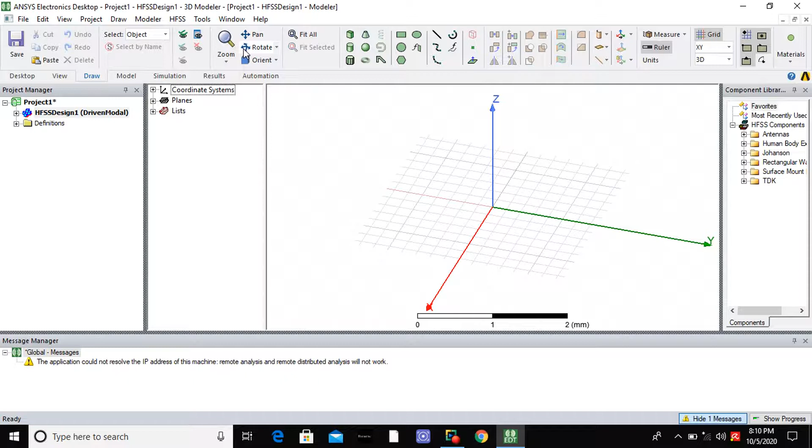First of all, we already know we are going to draw one microstrip patch antenna. The first one is the substrate, the bottom of the substrate is the ground, and the top of the substrate is the patch layer. So first of all, we are going to draw the substrate. Select box, then draw the box. Instead of Box1, you name it substrate.

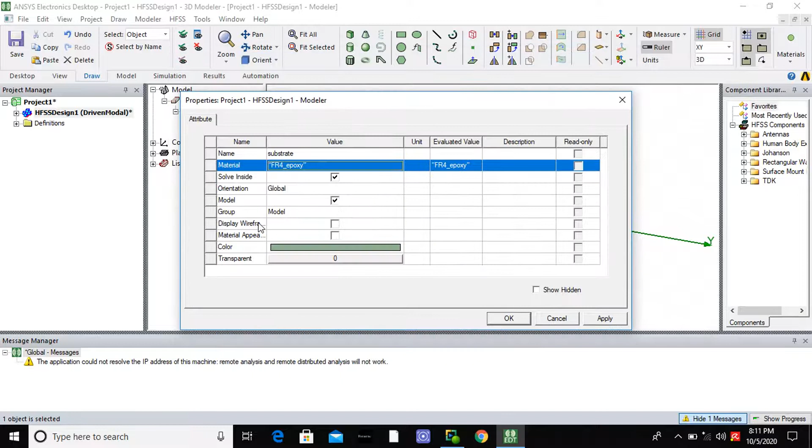Instead of material vacuum, you select FR4. Why are you selecting FR4? You already know it is easily available in the market. Select any one color, then OK, then apply, OK. Within the substrate, you have to give the length and width of the substrate. Here length is 60, width also 60, then Z, the height of the substrate, is 1.6.

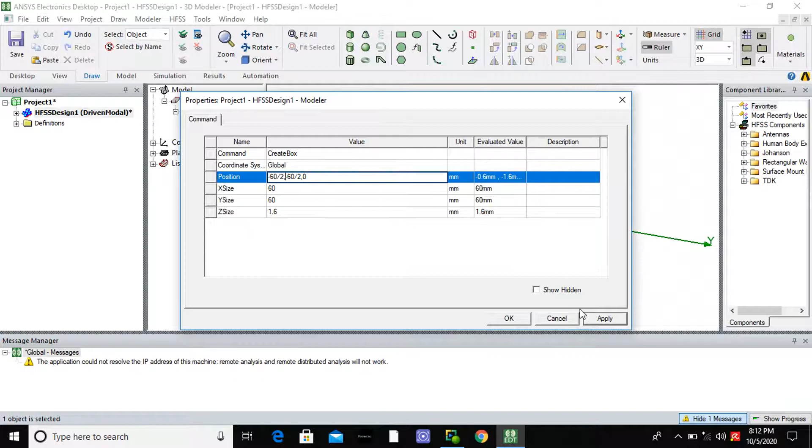For position, we are going to draw from the minus X and minus Y axis, the third quadrant. The starting position of the antenna is the third quadrant. So here you have to give minus 60 by 2 comma minus 60 by 2 comma 0. Then you give apply. Instead of point you give comma here, then apply, then OK, then press Ctrl D. The antenna substrate comes within the project window.

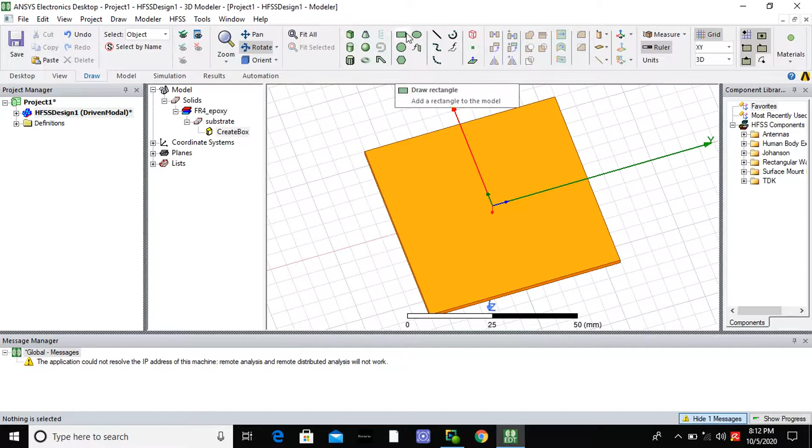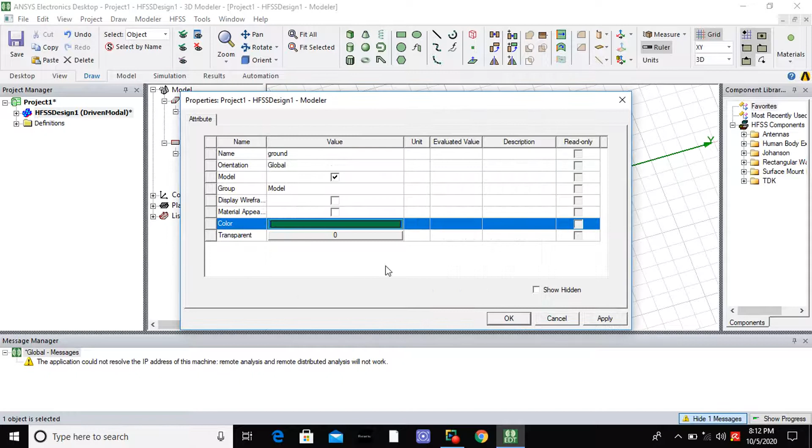Then we are going to draw the ground. Go to rotate, rotate this substrate, press Ctrl D. Then select rectangle. Ground is a 2D structure, so we have to select rectangle for the ground. Here instead of Rectangle1, we name it ground. Select any one color; here I am selecting green. Then apply, then OK. Then check that the ground position, length and width came automatically. Then rotate this object. Okay.

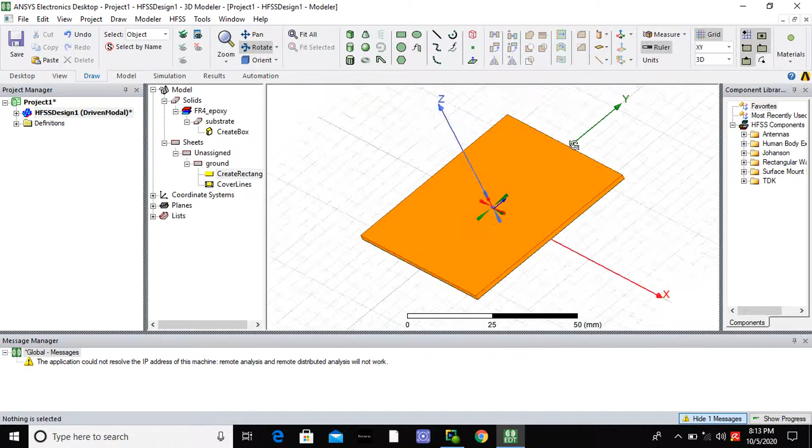Then above the substrate we are going to draw the patch. The patch is a 2D layer, so select rectangle and draw one rectangle. Instead of Rectangle1, name it patch. Select any color, then OK, then apply, then OK. Within that, we give the position, length and width of the patch.

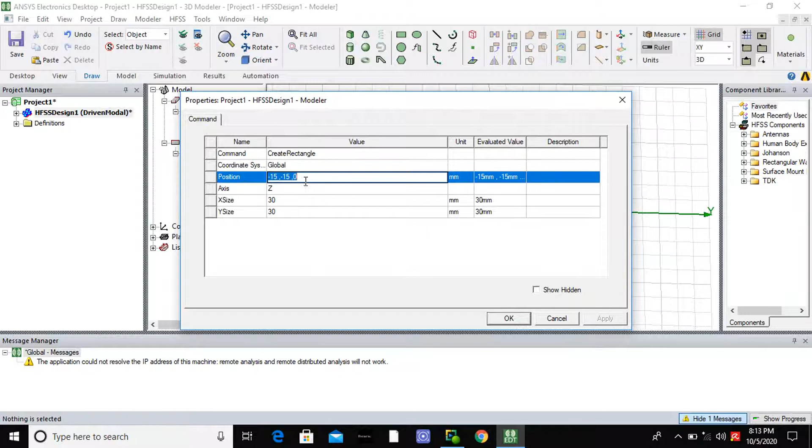Here position is minus 29.4 by 2 comma minus 38 by 2 comma 1.6. The height of the substrate is the height of the patch, 1.6. Here width is 29.4, then length is 38. Then apply, then OK.

After that we are going to draw the feed line. For the feed line, select rectangle and draw one rectangle. Here instead of Rectangle1, name it feed. Choose any color, then apply, OK. Within the feed, change the position, length and width of the feed.

Here the position of the feed is 0 comma minus 1.5 comma 1.6; the height of the substrate is the height of the feed, 1.6. Length of the feed is 30, then width is 3. Okay, then apply, then OK.

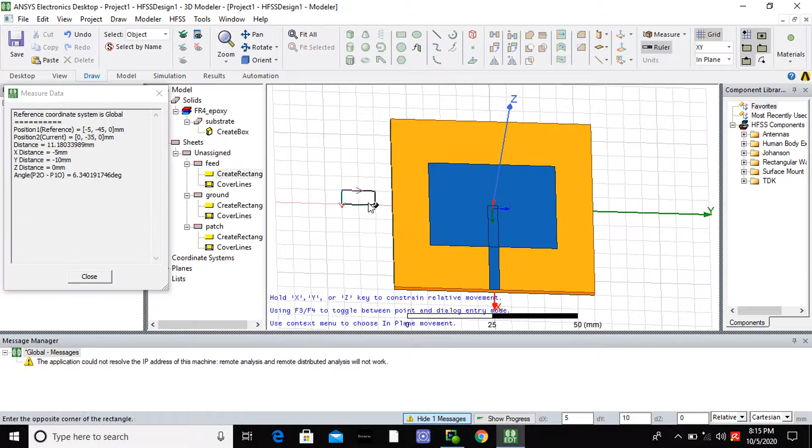After that you want to cut the patch, because we have to get 50 ohm impedance matching, so we have to cut the patch. Again select rectangle and draw one rectangle. Name that rectangle cut. Select any color, no problem. Apply, then OK. Within that cut, you give the length and width of the cut slot.

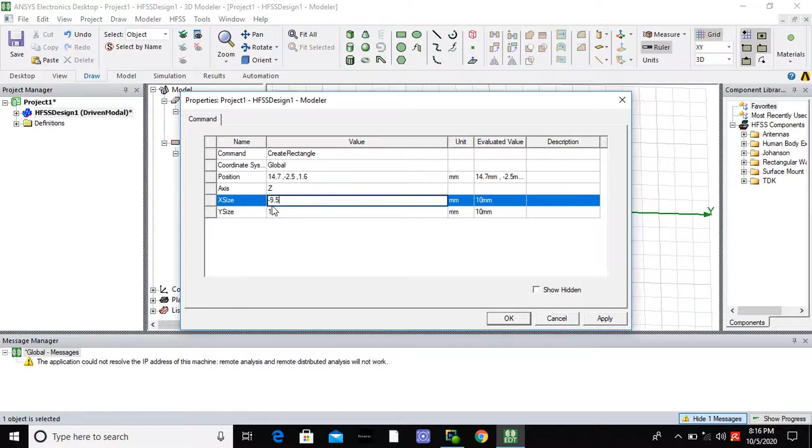Here position is 14.7 comma minus 2.5 comma 1.6. Length is minus 9.5, width is plus 5. Then apply, then OK.

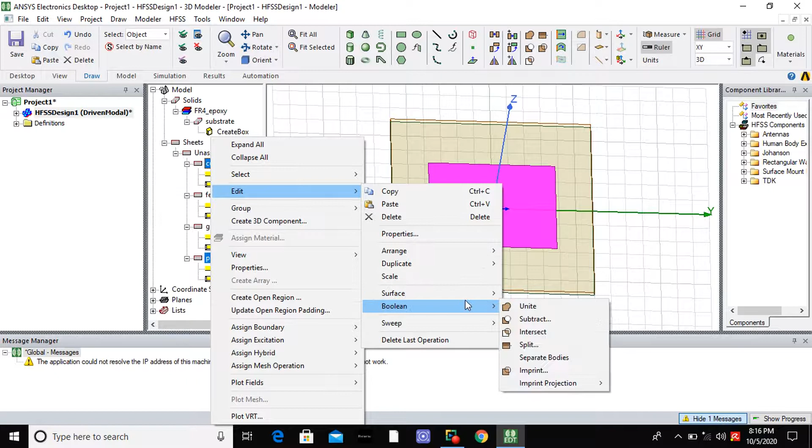From the patch we have to cut the slot, so select the patch, then cut, then right click, go to Edit, Boolean, Subtract, then OK. The slot is cut. Why are we cutting this slot in the patch? At that point the 50 ohm impedance is matched with the feed line. Then select patch and feed, right click, Edit, Boolean, Unite.

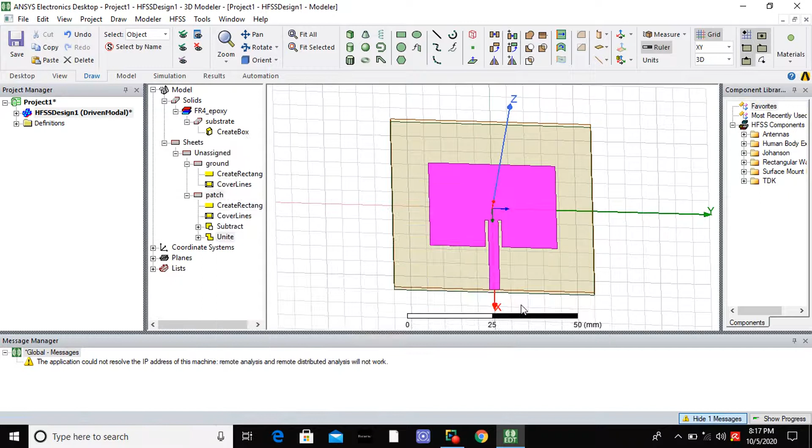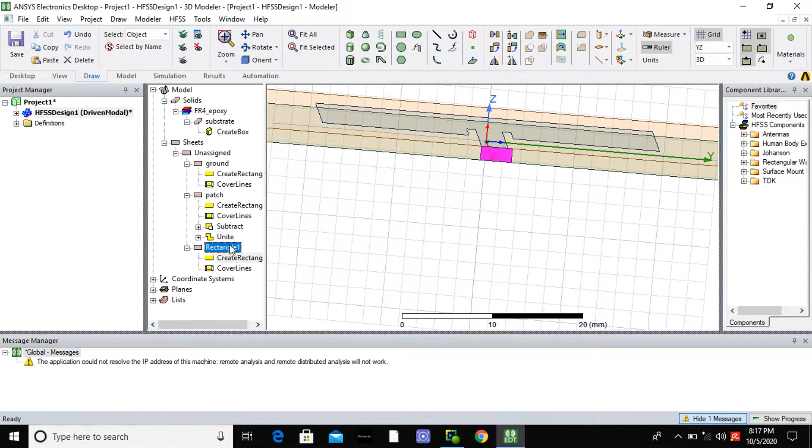After that you have to give the port for excitation. Select the YZ axis here, then draw one rectangle. Name that rectangle port, choose any color, then apply, then OK. Then instead of 3.5 you give 3. Why? Because the feed and port have the same width.

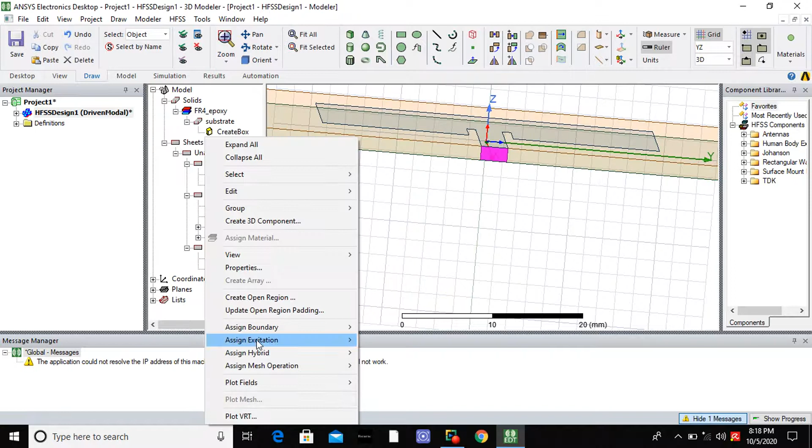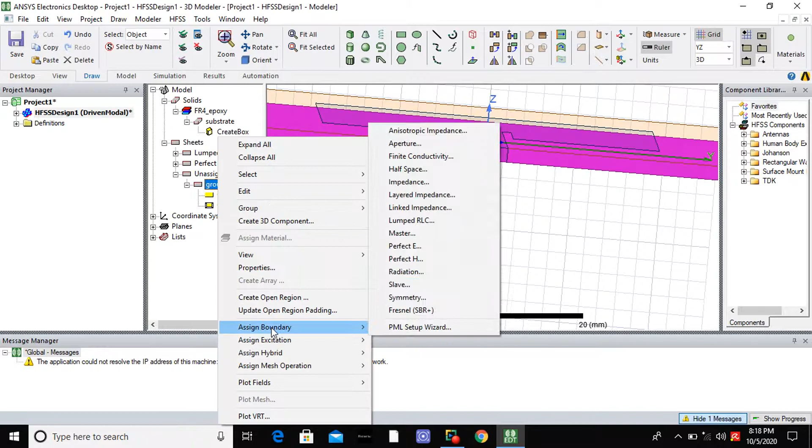Then select the port; we have to assign excitation, lumped port, 50 ohm. Here select new line, click at the bottom, then click at the top, then next, finish. After that, assign boundaries to the patch and ground: select the patch, assign boundary, Perfect E, then select the ground, right click, assign boundary, Perfect E, then OK.

After that, to create the radiation box, right click the project window, go to Create Open Region, operating frequency 2.4 gigahertz, then OK. Here instead of vacuum you give air, then OK, apply, OK, then press Ctrl D. For the radiation box, set transparency. Why? Because you want to see the antenna inside. Then OK.

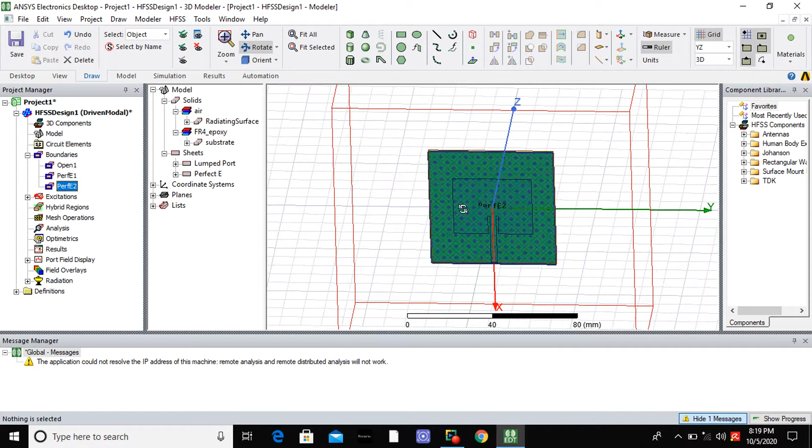Now check the boundaries. This is the radiation box. PerfE1 is the patch, then PerfE2 is the ground. Then the excitation is the port; only here you give the current. After that, go to Analysis, right click, Add Solution Setup. Here give 2.4 gigahertz. Maximum number of passes, 10. Then OK.

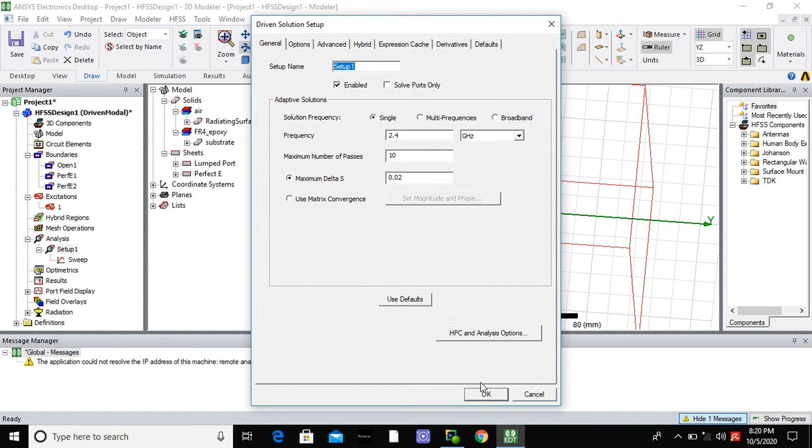Within that setup, right click, Add Frequency Sweep. Here frequency is 1 to 3 gigahertz. The points are 451. Then OK. Before that, check here: give fast. Don't give interpolating, give fast. After that, go to HFSS, validation check. Then go to HFSS, Analyze All.

Before simulating, you have to save the file in your system. I save it as insert, save. Now the antenna is simulating. We have to wait some time.

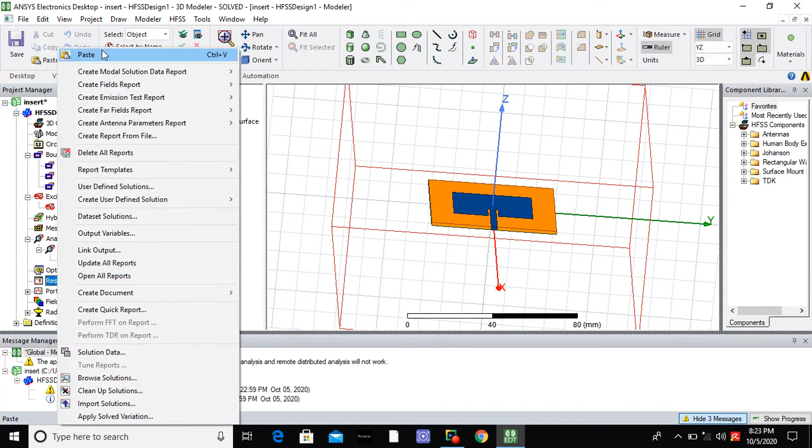After completion of the simulation, go to Results, Create Modal Solution Data Report. Select rectangular plot. In the rectangular plot, select S parameter, then New Report. Then close. Then right click, Marker, Add Marker. See here, the resonating frequency is 2.37, approximately 2.4 gigahertz. The return loss value is minus 21.9467.